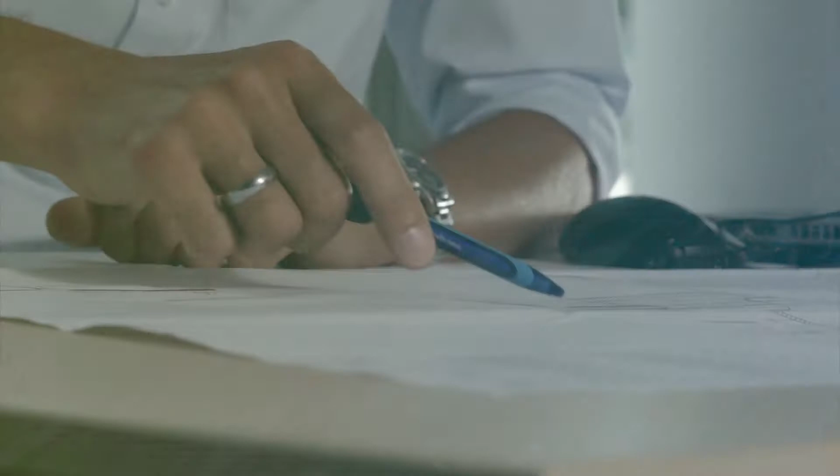But what are ecosystem services? Ecosystem services are the benefits that society gains from the environment, for example, clean water and air, decomposition of waste, pollination of crops, or even the recreational value of a beautiful landscape.

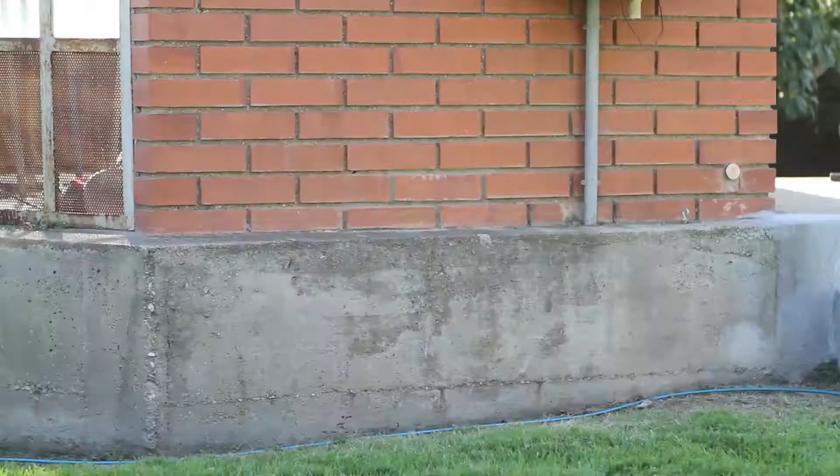If we can quantify these services and express their value in monetary terms with a tool, this is helpful for assessing the environmental and societal effect of a new technology or management solution.

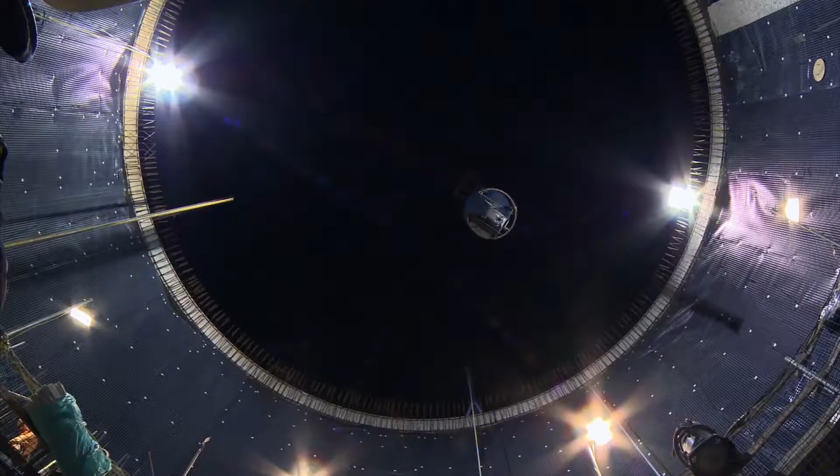One of the main challenges when implementing new technologies or policies is the limitation of existing comprehensive frameworks to compare new alternative solutions and established ones with regard to their broader effects.

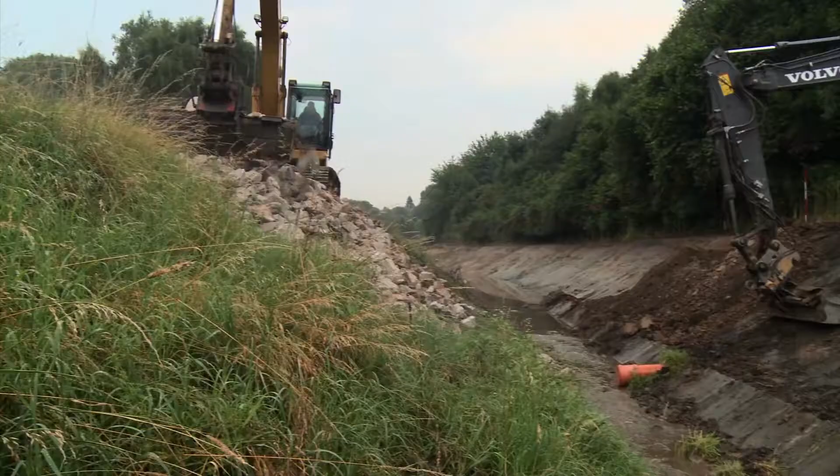To change the situation for the water sector, DESSIN has developed the Ecosystem Services Evaluation Framework, a tool enabling a standardized evaluation of impacts from innovative measures on ecosystem services. The tool considers the environmental, economic and social dimensions to enable better decision-making and to generate additional arguments for market uptake and practical implementation of new solutions.

To validate and test this methodology, the Ecosystem Services Evaluation Framework has been applied to 5 demonstration sites across Europe, located in Westland in the Netherlands, Llobregat in Spain, Athens in Greece, Emscher in Germany and Hias in Norway. Let's discover what has been demonstrated in each demo site.

The Westland demo site in the Netherlands is located near the North Sea, in one of the world's largest horticulture areas. Due to seawater intrusion, the resources of fresh water in coastal areas are limited, while demands are high, resulting in freshwater scarcity for drinking water, industry and agriculture.

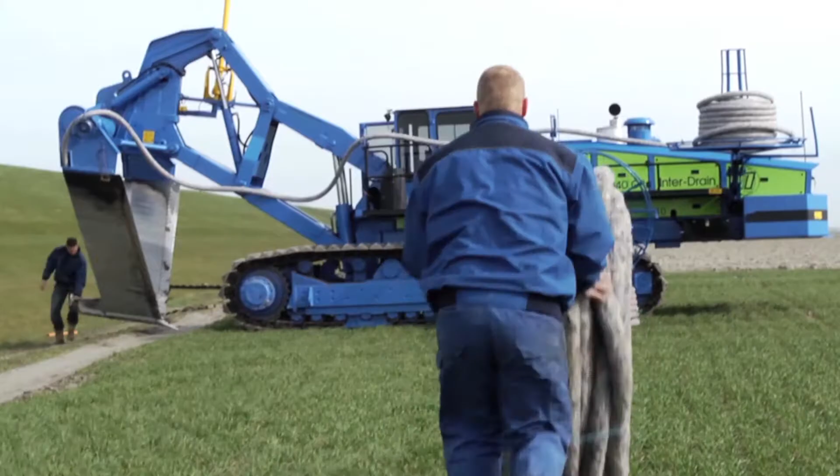Rainwater is the most suitable freshwater source for horticulture, but the challenge is how to harvest and store this freely available water of high quality. Above-ground basins are one option, but these basins are limited in volume. Another challenging option is to store excess rainwater in the subsurface by using aquifer storage and recovery, shortly called ASR.

However, the situation for this technique in coastal areas is rather complicated due to the presence of brackish and saline groundwater. The Westland team demonstrated that the potential of storage and recovery of fresh water in saline aquifers significantly improves through innovative well design by combining aquifer storage and recovery solutions with reverse osmosis desalination. This concept is called ASRRO, aquifer storage and recovery combined with reverse osmosis.

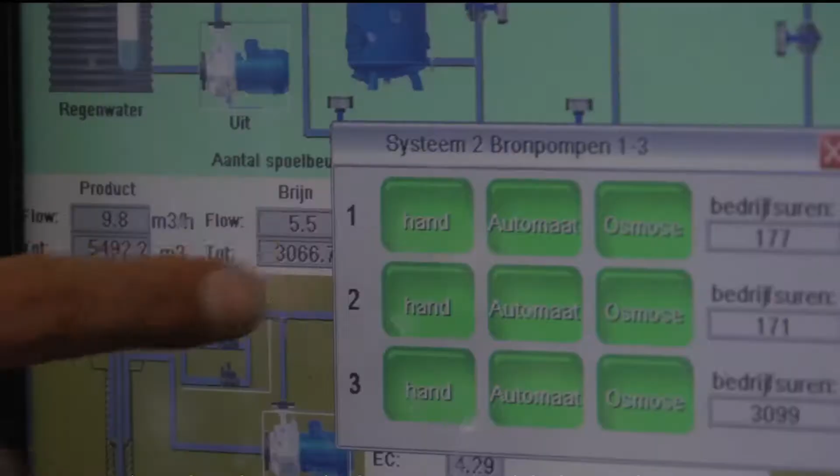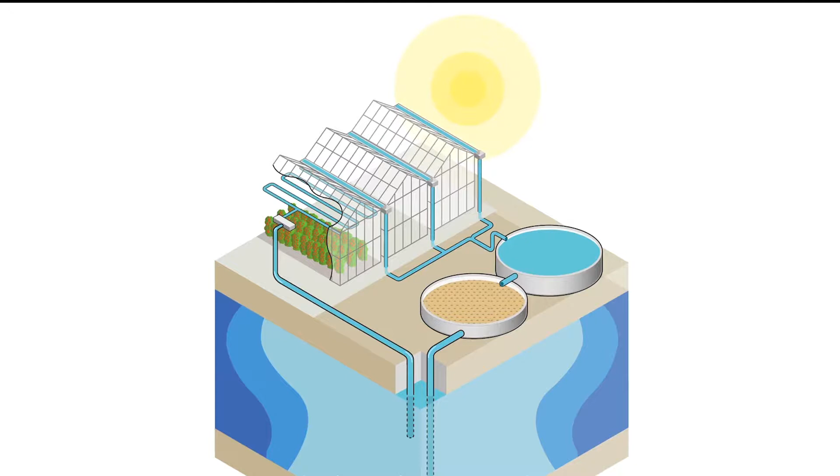In the Westland demonstration site, rainwater is infiltrated at various depths in the aquifer. At the abstraction stage, fresh water is recovered mainly from the upper layer of the aquifer. By also extracting brackish water from the deeper layer of the aquifer and treating this water with reverse osmosis, the recovery of fresh water is much higher than with conventional well design.

ASRRO proves to be a very promising solution for freshwater scarcity problems in coastal areas. Moreover, due to ASRRO, further salinization of coastal aquifers can be limited. This pilot case has developed into a regional showcase, with the aim to support scale-up and application to other coastal areas in the world.

In Spain, the Llobregat team has improved the environmental and economic sustainability to the managed aquifer recharge facility of Aguas de Barcelona by injecting pre-potable instead of potable water into their aquifer storage and recovery system.

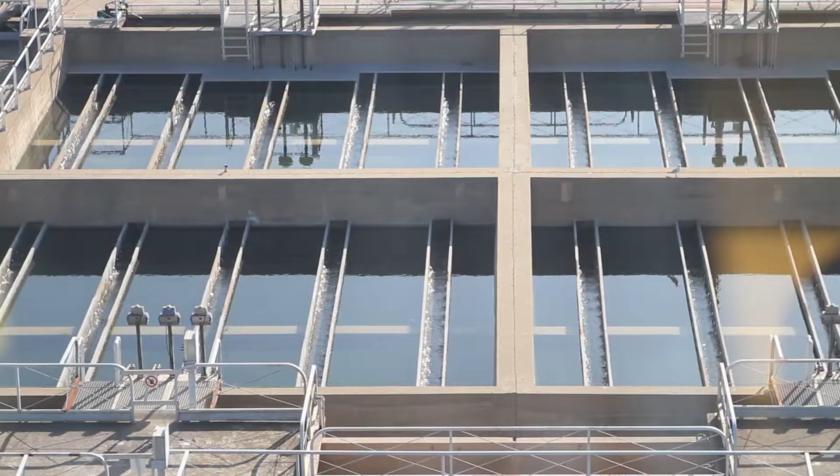The pre-potable water comes only from the conventional treatment of the Llobregat River water, thus saving the energy and the use of chemicals that are needed for the advanced treatment to achieve drinking water quality.

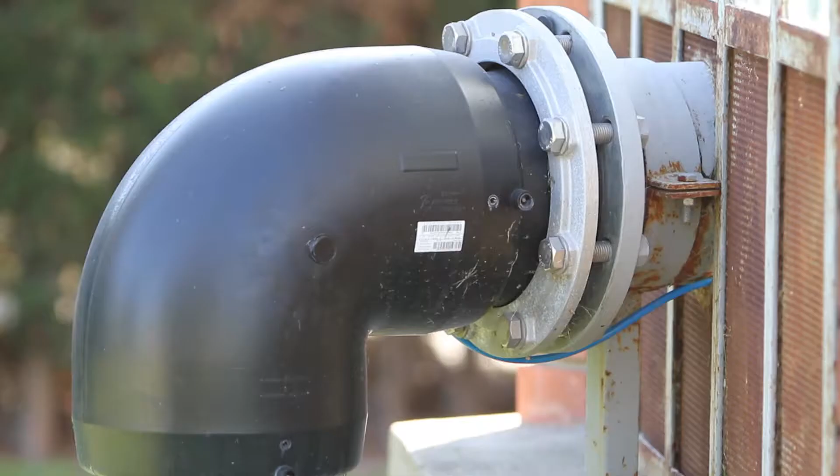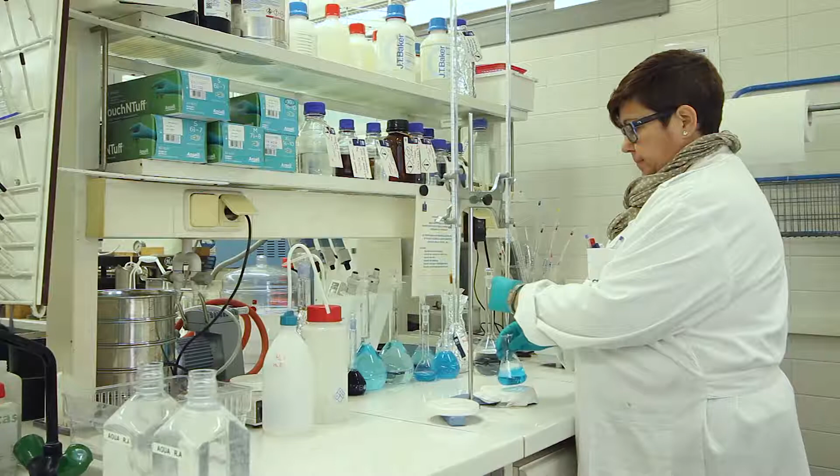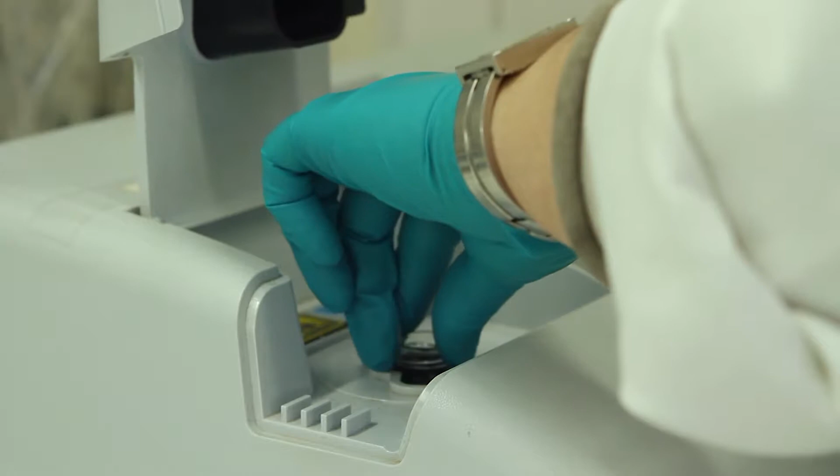For 1 year, this procedure was tested before the impact of the recharge on the quality and quantity of the water in the aquifer was evaluated. To understand the impact, variables such as salinity, nutrients and indicator microorganisms were monitored in the injection zone and its surroundings. Statistical analysis and modelling of the recharge at real scale demonstrated the positive impact that recharge with pre-potable water has on the aquifer, improving the environmental and economic sustainability of the current system.

The city of Athens in Greece has suffered rapid urbanisation, resulting in few urban green spaces. This, coupled with peri-urban forest fires in the last decade, has caused severe degradation of its environment and quality of life for its inhabitants. To irrigate these spaces and create new urban green spaces in a water scarcity context, we need innovative management options and technologies for water reuse. At the Athens demo site, DESSIN has demonstrated a fully automated packaged treatment plant that mines wastewater directly from the sewer network, treats it, and reuses it at the point of demand.

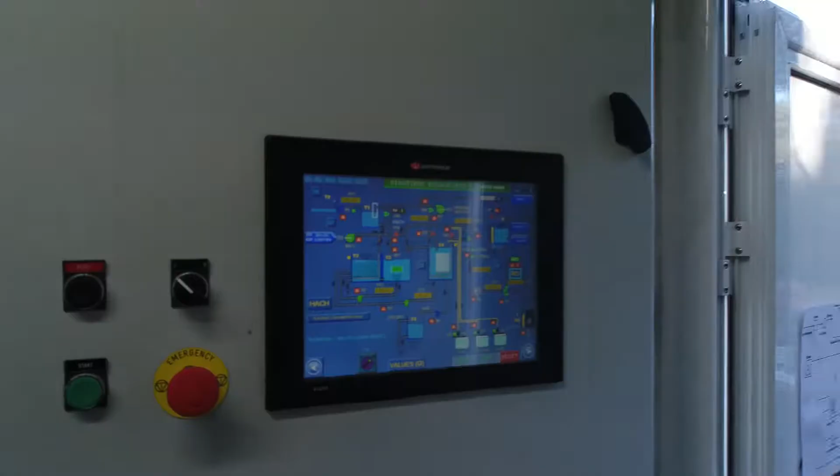The unit can be remotely monitored and operated, with performance data recorded in real time to allow operators to visualize all relevant information and make timely decisions. The sewer mining unit consists of two subunits: a membrane bioreactor (MBR) and a reverse osmosis (RO) unit. Both have been constructed as individual packaged modules joined together in one compact system, offering high efficiency, remote operation and monitoring, as well as ease of transportation.

The double membrane treatment scheme tested, MBR-RO, achieved very high quality treated effluent, which can reliably meet all national and international standards for non-potable wastewater reuse at a moderate cost. Application of this solution in Athens has revealed several additional benefits in the form of ecosystem services. We found, for example, that irrigating green spaces with sewer mining can significantly mitigate the urban heat island effect, and therefore lower energy demands and related costs for air conditioning in nearby neighbourhoods.

We also explored how such units can be deployed either by water companies or SMEs in partnership with water companies, creating green jobs and services.

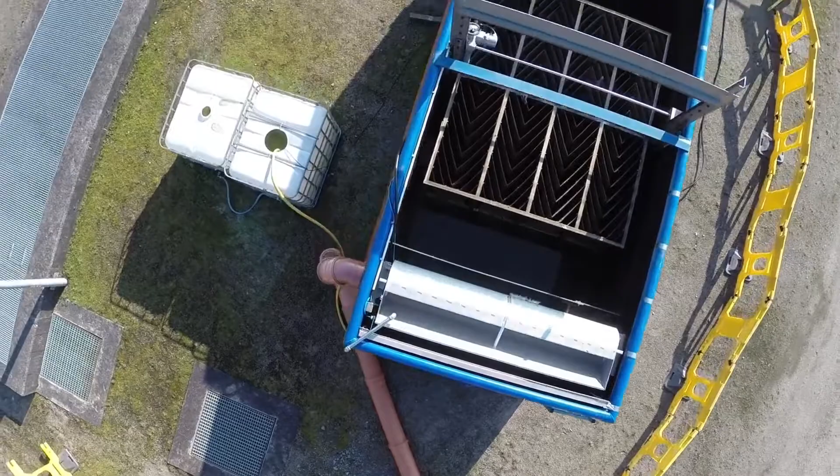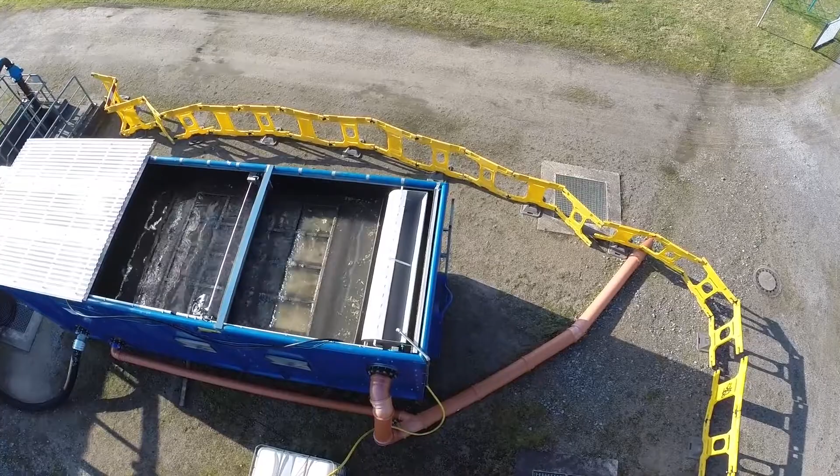Two demonstration technologies have been pilot tested in the Emscher catchment in Germany: a lamella settler at a combined sewer overflow facility, and a real-time control system to regulate the sewer system, both focused on water quality issues. The aim is to decrease the amount of combined sewer overflow and improve the quality of the overflowing water, enhancing water quality in recipient rivers. The lamella settler pilot container increases sedimentation of solids in stored combined sewage, pre-treating the water before overflow into a recipient stream occurs.

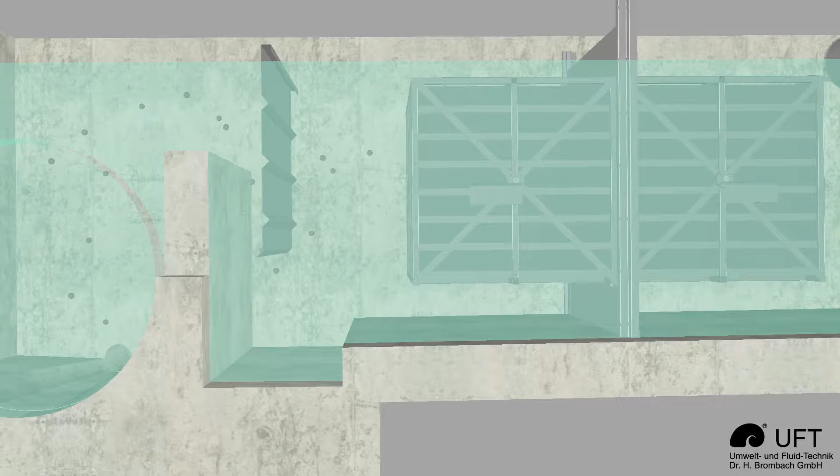The pilot real-time control system controls the water levels of 5 CSO facilities in the upper Emscher River section. This innovation allows optimal utilization of the entire available underground storage volume, with the final aim to reduce pollutant input into streams by reducing the overflow frequency and volume from CSOs into streams.

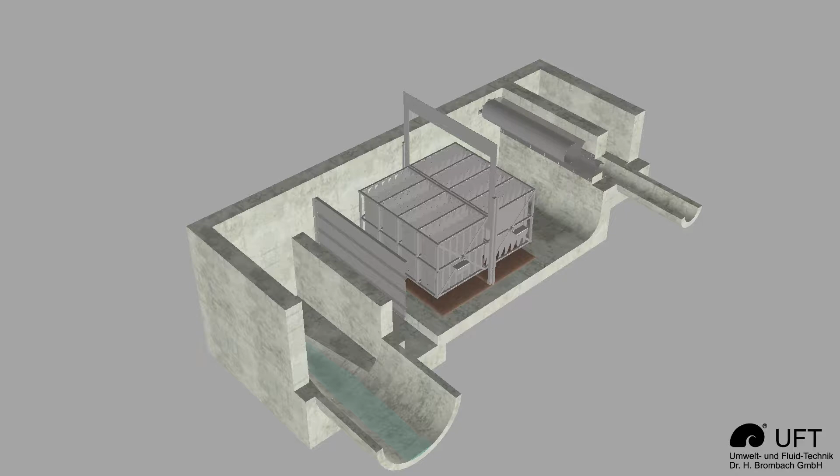The Hoffselva River in Oslo, Norway, flows through an increasingly populated and urbanized area. As an important natural element in the urbanized environment of the lower catchment, the Hoffselva River provides recreational services which are affected by water quality. Along the river, there are several combined sewer overflow facilities, called CSOs. During heavy rain events, they discharge untreated water with a high content of sewage garbage and particles, as well as nitrogen and phosphorus, into the river.

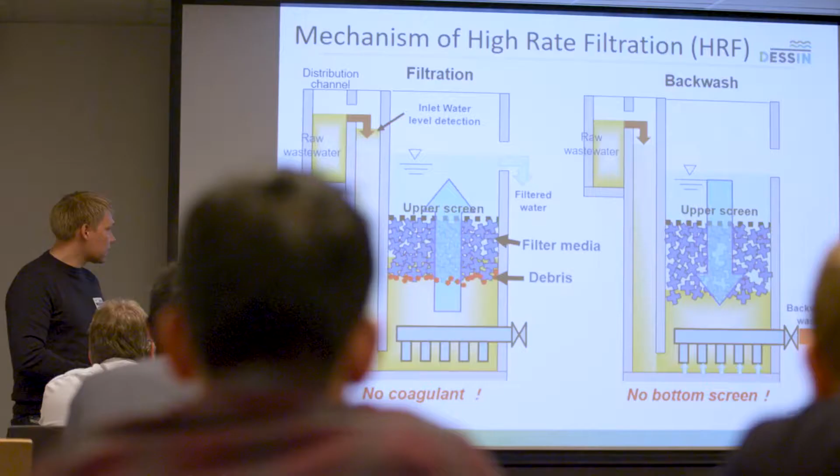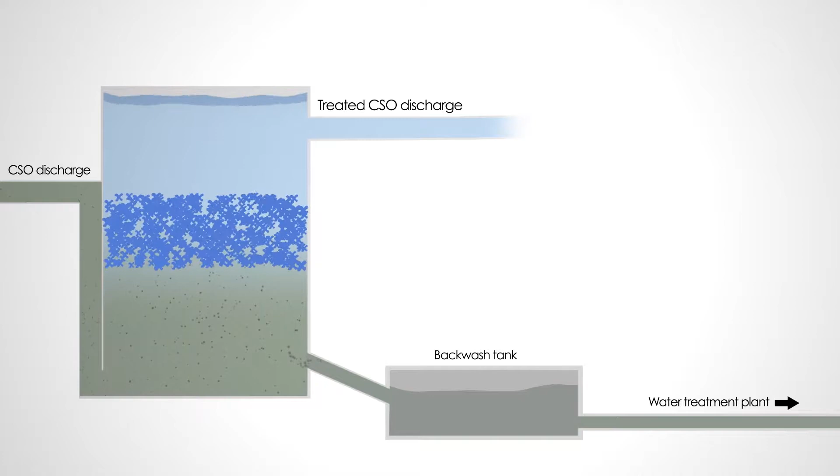Therefore, DESSIN has demonstrated local treatment solutions for the overflow from CSOs. At Hoffselva, two technologies have been demonstrated: a modular cross-flow lamellar settling unit for local treatment of combined sewer overflows from detention tanks, and a high-rate filter solution that can be installed on the CSO outlet pipe for smaller structures without a detention tank.

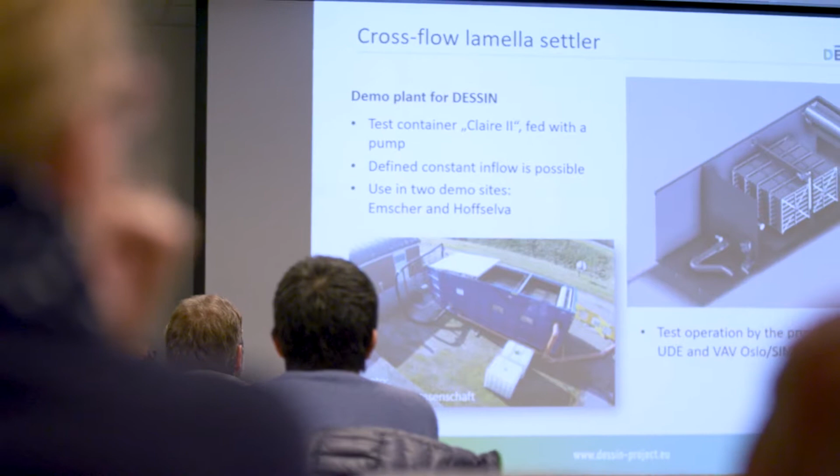The results demonstrate that there are feasible solutions to mitigate some water quality problems caused by CSO. They can be a cost-efficient alternative to increasing the hydraulic capacity of a sewer system.

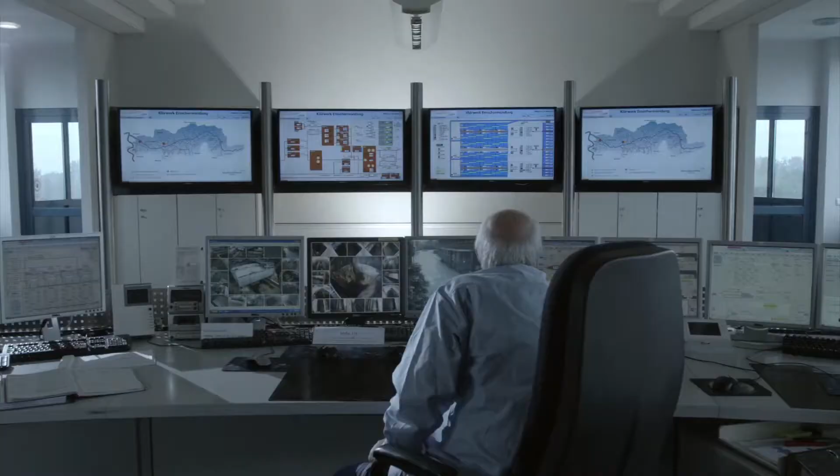More than 50 researchers have been working together for 4 years to develop and demonstrate the DESSIN solutions, and the DESSIN ESS evaluation framework tool has been successfully applied at all demo sites. It was proved that a harmonized methodology to evaluate ecosystem services and sustainability in the water sector is possible and applicable. Giving value to ecosystem services can improve decision-making in water management and provide new arguments for market uptake and practical implementation of new solutions.

Apart from that, DESSIN has delivered a portfolio of technical solutions for water scarcity and water quality challenges, which have been validated in the 5 demonstration sites across Europe.